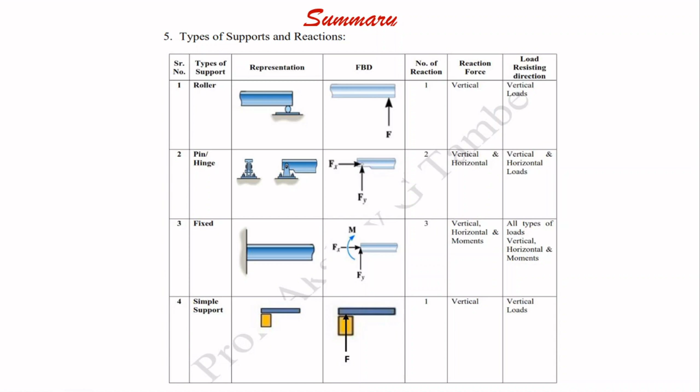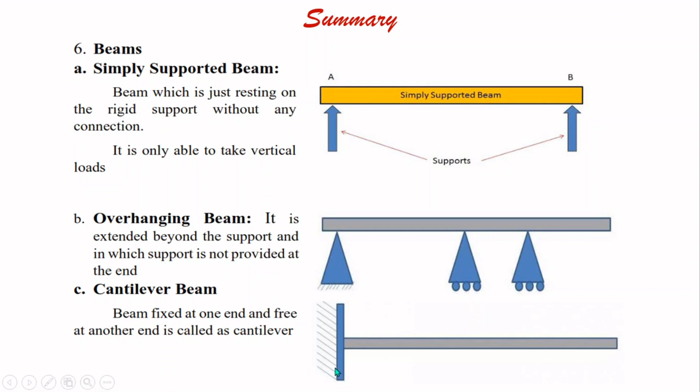So some beams are there that are asked in MCQ. Simply supported beam, beam which is resting simply on the supports. Overhanging beam, overhanging means some portion is extended beyond the support. For example, balcony that is extended beyond the wall. Cantilever means beam is fixed at one end and free at other end. Fixed beam, it is fixed from both the sides.

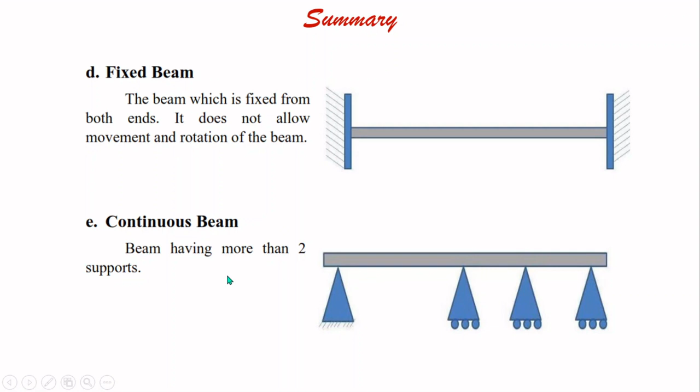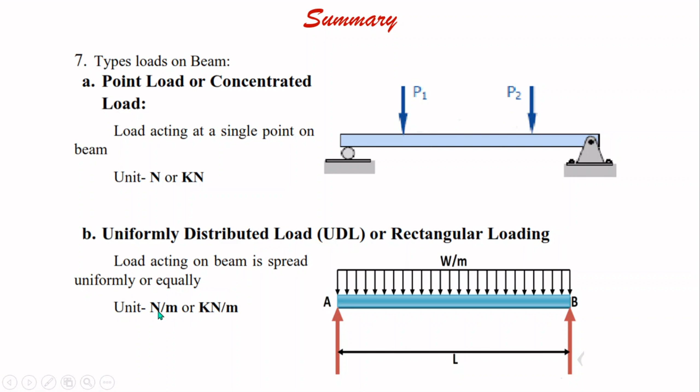So there are loading conditions on the beam. First is your point load or concentrated load, which is acting at a single point. So unit of load or force is Newton or kilonewton. Second is uniform distributed load, in short UDL. It is also called rectangular loading because the shape formed due to the load is rectangle. So unit of this type of load is Newton per meter or kilonewton per meter.

Third type of loading is uniformly varying or triangular loading because shape taken by load is triangular. So unit is Newton per meter or kilonewton per meter.

Then every structure is divided into two types: determinate and indeterminate. So determinate means whatever number of unknown forces are there for that structure should be equal to the number of equilibrium conditions, that is 3. So maximum number of unknowns should be 3. In that case the structure is determinate, and if it is not equal to 3, say number of unknowns are more than 3, then it is indeterminate structure.

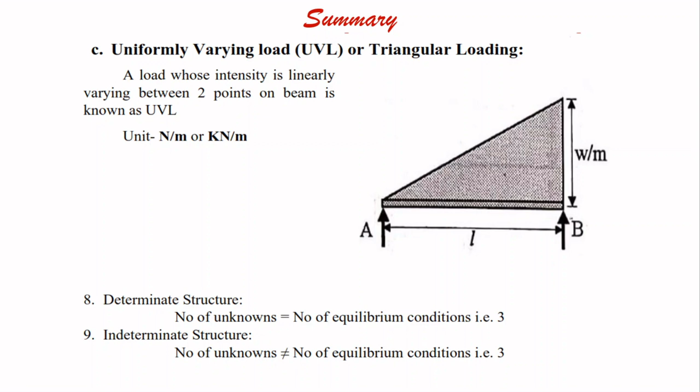Now we will see about space force. So the vector representation of space force in terms of ijk is F = Fx i + Fy j + Fz k. So Fx, Fy, Fz are the x, y, z components of force F.

To find the magnitude of F bar: under root of Fx square plus Fy square plus Fz square. And direction: cos θx = Fx/F, cos θy = Fy/F, and cos θz = Fz/F. So from these we obtain the equation cos²θx + cos²θy + cos²θz = 1.

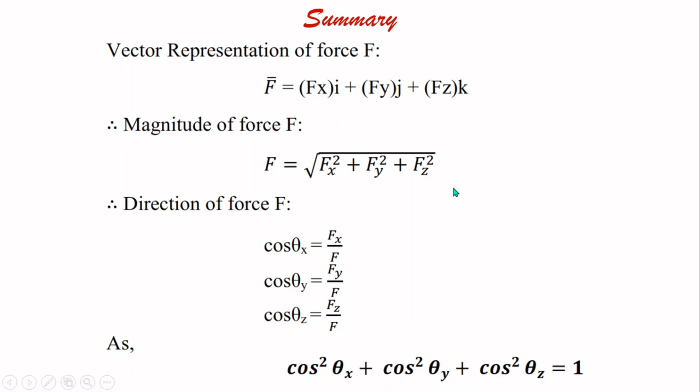So there are two conditions in space force. If force is passing through only one point, that is a single point, F bar can be represented as F cos theta x i plus F cos theta y j plus F cos theta z k.

If force is passing through two points, suppose point A and point B, this F bar can be represented this way. F bar is equal to F into (x2 minus x1) i plus (y2 minus y1) j plus (z2 minus z1) k, divided by the under root of the square of all these terms: (x2 minus x1) square plus (y2 minus y1) square plus (z2 minus z1) square.

Now we will start with our actual problems. First is the free body diagram of coplanar and concurrent forces shown. So FBD shows internal and external forces, self weight and reaction due to the support, forces in cables and links, and the last one is internal forces, external forces, forces in cables and links, self weight and reaction due to the support. All the options are correct, but most correct is the last one, which covers all the options. So the last one is our answer.

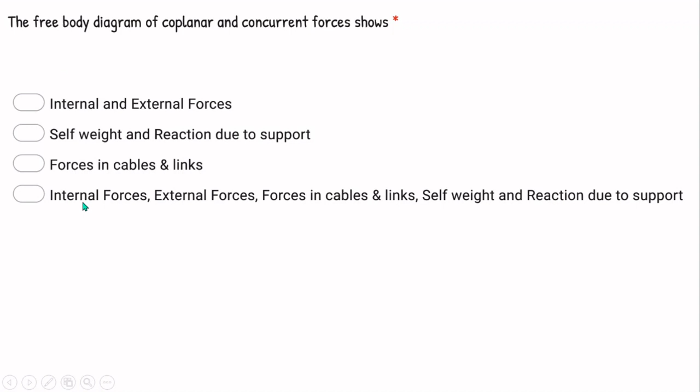Next, the particle acted by two forces will be in equilibrium if two forces have equal magnitude and are having. So if any body is subjected to two forces, for equilibrium of this body, the two forces should have the same magnitude, be opposite in direction, and be collinear. So our second option is correct, that is opposite direction, but it should be collinear.

Next, a problem on a beam is given. Beam AB of span 1 meter, hinged at A and simply supported at B, is loaded with a uniformly varying load of 10 Newton per meter intensity at end A and 20 Newton per meter at end B. The reactions at end A are?

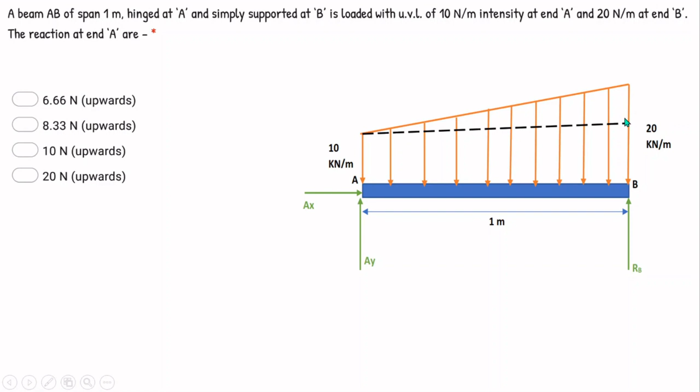So this load will act at the CG. The rectangle CG is always at half of the distance, that is B by 2, so 0.5 meter from both sides A and B. Then the point load of the triangle. Area of triangle is 1/2 base into height. So base is 1 and height...

This 10 kilonewton per meter height is already measured in the rectangle, so the remaining height is only 10, that is 20 minus 10. So 5 kilonewton acting at the CG. The CG of a right angle triangle is B by 3, that is 1 by 3, so 0.33 from point B.

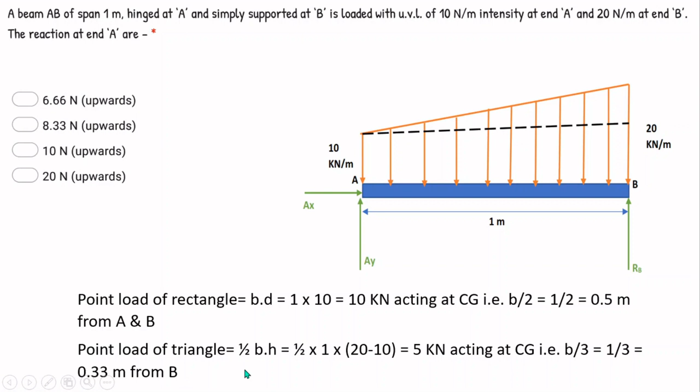Now we will see the free body diagram. This is the free body diagram. Now just apply the equilibrium conditions. Applying Fx equal to 0, you get Ax equal to 0. Fy equal to 0: in the vertical direction, Ay and Rb upward, and this 10 and this 5 downward. Then taking the moment at point B: minus 5 into 0.33, then minus 10 into 0.5, which is equal to Ay into 1. So we get the value of Ay as 6.65.

After placing all these values in this equation, the reaction Ra is equal to the under root of summation of Ax square plus summation of Ay square. Ax is 0, Ay is 6.65, so the reaction at A will be 6.65. That will be our answer.

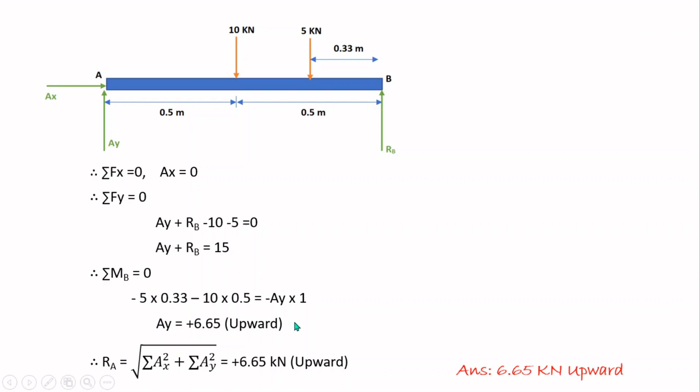The restriction to the motion of a body in a particular direction is called as? It is a constraint, because it is a resisting surface; that surface is called a constraint. It decides in which direction the body will not move.

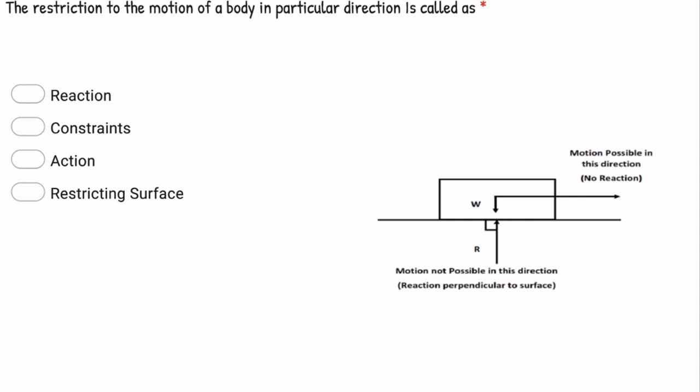Force in space is defined as: force traveling through space, non-coplanar force, force acting along the diagonal of a cube, and all the above. So all the above is the correct option. All these are the definitions of space force.

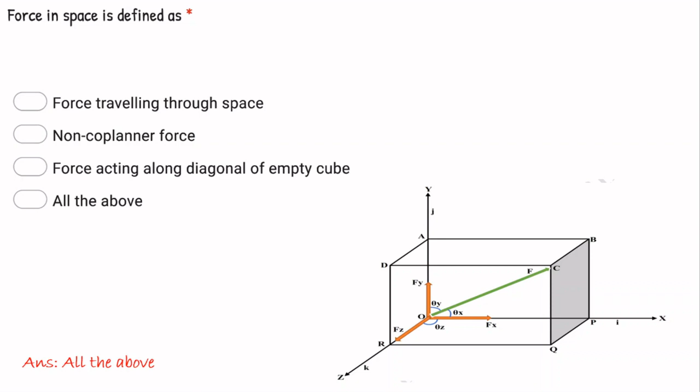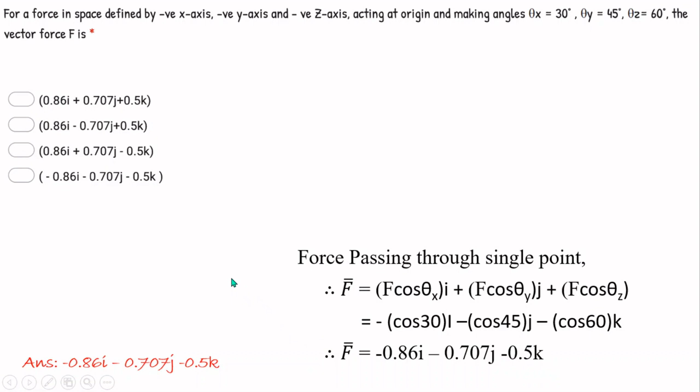After putting all these values, you will get minus cos 30 i minus cos 45 j minus cos 60 k. The negative sign is given because the x, y, z axes are negative. So you will get minus 0.86i, minus 0.707j and minus 0.5k. So our last option is correct.

A force of 900 Newton acts from point A, whose coordinates are given, up to point B, whose coordinates are also given. They have asked the x component of force, that is Fx. So this is the case of a force passing through 2 points, point A to point B. We take A as x1, y1, z1 and B as x2, y2, z2, and force F is 900 Newton. So use the formula for a force passing through 2 points.

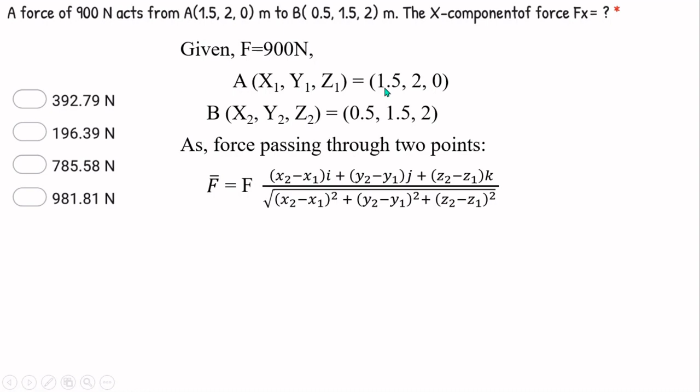In this formula you just have to put the values: x2 minus x1. So x2, the x component of B, is 0.5, minus x1, that is minus 1.5. Then y2 minus y1, that is 1.5 minus 2, and z2 minus z1, so 2 minus 0. After placing the values, F is 900, and after calculation we get minus 1i minus 0.5j plus 2k, divided by the square root of the sum of squares of the coefficients of i, j, k.

After solving this, you will get F bar as 392.79i minus 196.39j plus 785.58k. They have just asked the x component, so the coefficient of i, 392.79, is your Fx. That is your answer. Other answers are also given if they ask the y component or z component, so accordingly you can select.

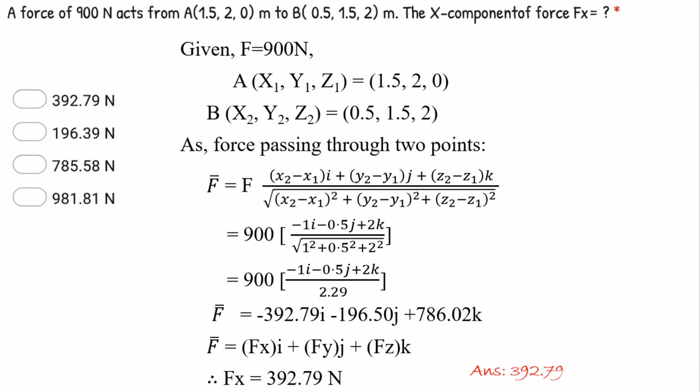Hope this video will be helpful for you. So this was all about MCQs based on this unit.